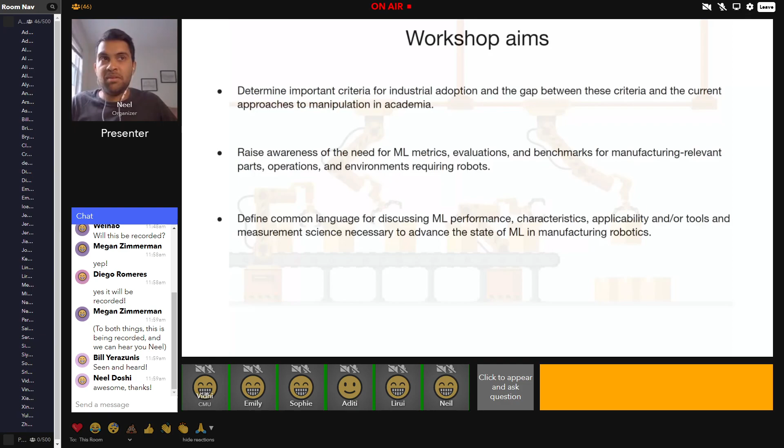The third is to define a common language for discussing ML performance. This is across both industry and academia. Common language for discussing ML performance, characteristics, applicability, and/or tools and measurement science necessary to advance the state of ML in manufacturing robotics. And the last one is form an ongoing community to develop, review, test, and contribute to concepts and tools that can help foster the adoption and implementation of ML-based manufacturing robotics capabilities.

In order to address these 4 aims, our workshop will consist of 4 sessions. Right after this will be speaker session 1, where we'll hear from 2 speakers. And immediately following that will be speaker session 2, where we'll hear from 3 speakers. There'll be a short 30-minute break, followed by an hour-long poster session, where we have 7 posters, followed by speaker session 3, and then an hour-long panel discussion. There will also be discussions at the end of each of the speaker sessions, so at the end of 1, 2, and 3, and those will be about 30 minutes, and they will just be limited to the presenters in that particular session.

We're going to hear from 8 awesome speakers today from both academia and industry. Actually, I think we have kind of an even split if you don't count people that have 1 foot in academia and 1 foot in industry as well. These are Jeanette Bohg, Matej Hoffmann, Danica Kragic, Arnold Kravitz, Juan Aparicio Ojea, Parag Patre, Al Rizzi, and Russ Tedrake.

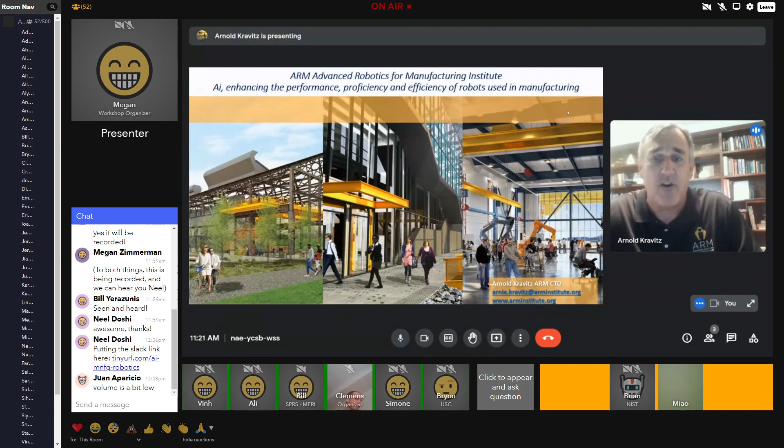So just to talk to you all about the ARM Institute first, I know not everyone is familiar with us. We are one of the DoD institutes. We are actually majority funded by the DoD's Office of Secretary of Defense. We're also funded by the R.K. Mellon Foundation and a lot of other foundations out there. We're about a 310 strong consortium of the leading robotics original equipment manufacturers, integrators, and tier 1 research universities, as well as innovators, and various government departments, including NIST, Department of Commerce, and the DoD.

As you can look through this very crowded array of pictures, and it's purposely crowded to tell you what a crowd we are, you can see just who this makeup is, from 3M on the material side of things, to Yaskawa as a robot OEM, to IAM Robotics in the area of autonomous mobile robots, to GE, to Raytheon, to Waypoint Robotics, to Fanuc, to UR, to Texas A&M University, Carnegie Mellon University, RPI, my alma mater, and many others.

It's a really great consortium. And what we really do bring to bear is the consortium of our members. The membership is our strength. And what we're really trying to do is maintain United States access to the latest robotic manufacturing and to encourage, enrich an ecosystem and a supply chain. So just to give you some of the views about us, we accelerate the development and adoption of innovative robotic technologies. We make robots, autonomy, and AI more accessible to U.S. manufacturers. We like to say we're democratizing the technology.

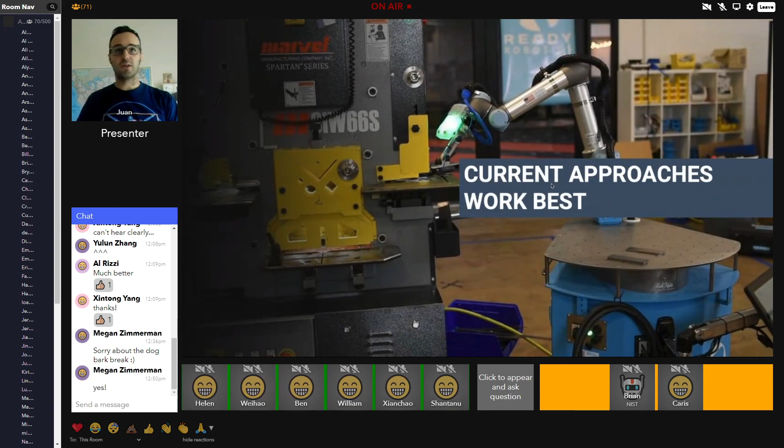First one, current approaches work best. I will play this video in a second. You will see a robot tending a lathe at the Stanley Black & Decker facility. I will argue, guys, if you go to a factory, if you can control the way that you are feeding the parts, right? The input to your process and the output of that. You will be much better if you don't have a camera, and obviously much better if you don't have any deep learning involved, right?

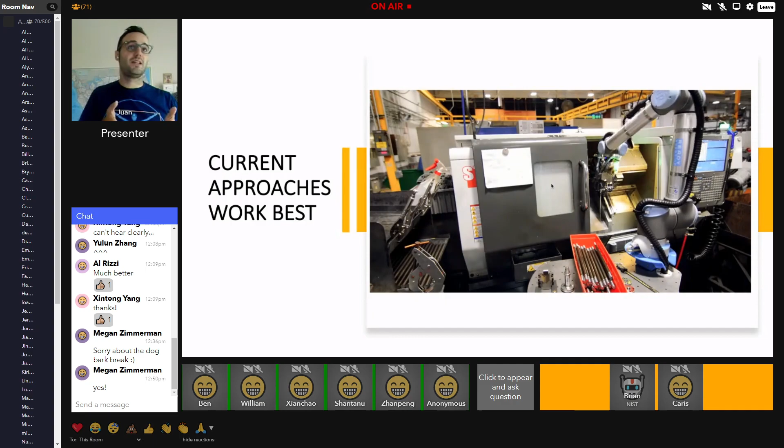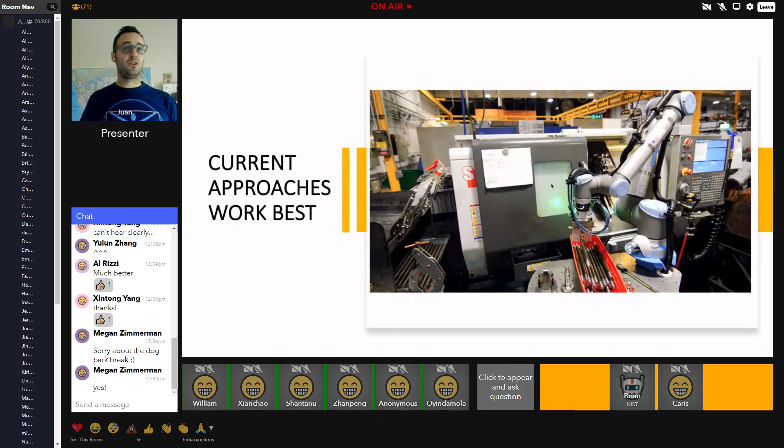Because what you care about in automation at this point is precision and speed, and these things only slow that down. If you add a camera process or any other intelligence in the loop, it will naturally be slower. So if what you're doing, like in this case feeding bars into a lathe, you can do it with traditional good old-fashioned controls and industrial automation.

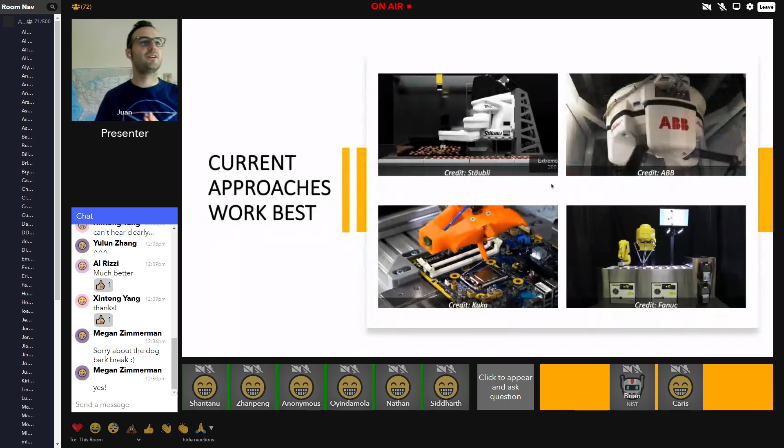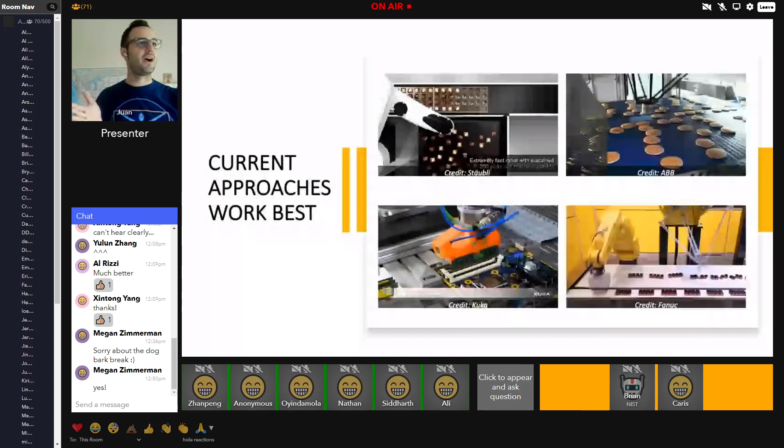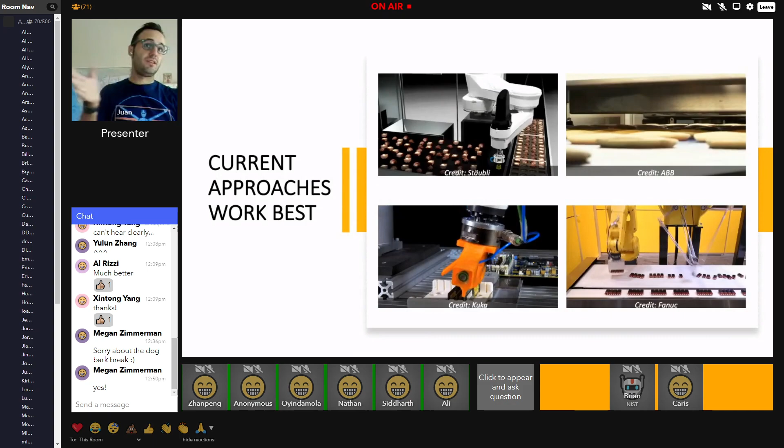Now let's say you really want to use a camera because you need it in your process, either for sorting candies, pancakes, or chips. In these four videos from top robotic brands, you can see you can also be very fast. There are Delta robots that work extremely fast, no AI needed, just good old-fashioned machine vision. You detect geometries that are easy enough to detect, and you just pick and place. And even in the example in the bottom left from KUKA, if you can afford fixtures, it's quite straightforward nowadays to create rules with force and torque sensors that enable you to do complex assembly like the one you see in the video.

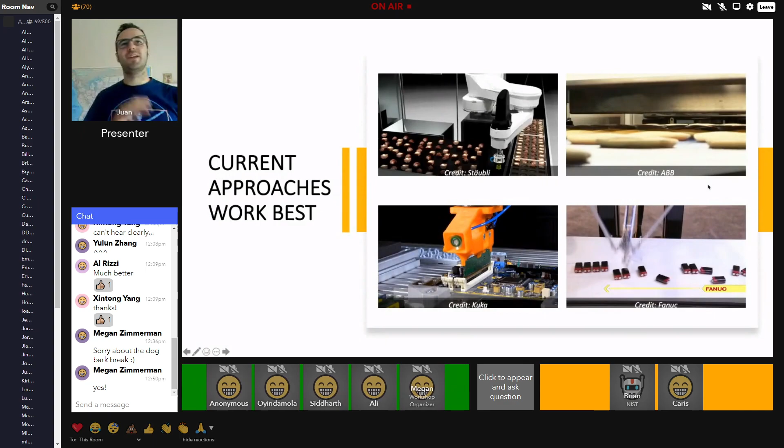Adding complexity, as you see in the video, all the objects are individualized — they are sorted out, not in heaps. So what happens if the objects are fed in heaps, all together? You still have solutions out there in industrial automation that enable you to individualize components, like the videos from FlexiBowl and Asyril here on screen, where there are bowls and surfaces that vibrate, and then the objects get individualized.

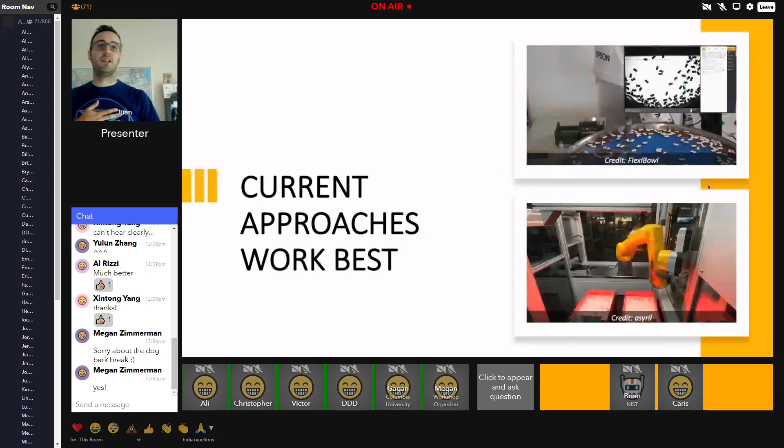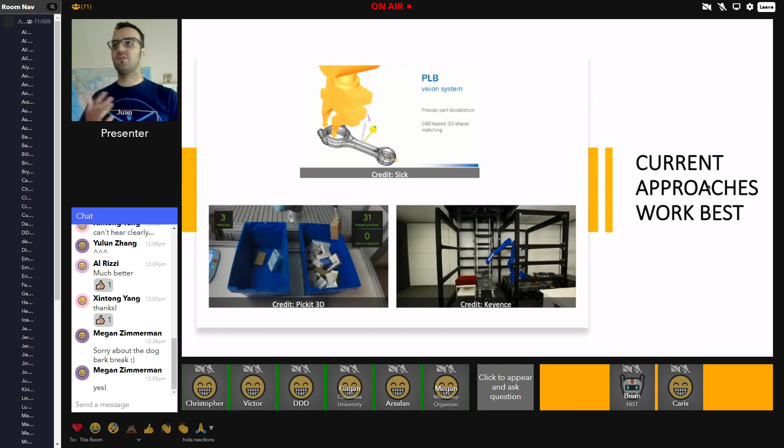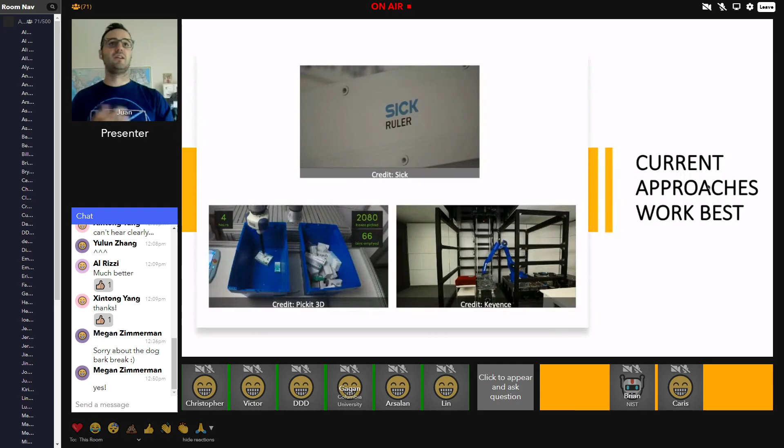Okay, but what if you cannot individualize the objects — either your ROI gets too expensive if you add these components, or you cannot control the way you get the boxes of material? Still, there are current approaches, like what you see on screen from Sick, Keyence, or Pickit 3D, using CAD-based 3D shape matching that works quite well. They leverage the fact that these parts have geometric features that are easily identifiable, so you can still pick them from a bin.

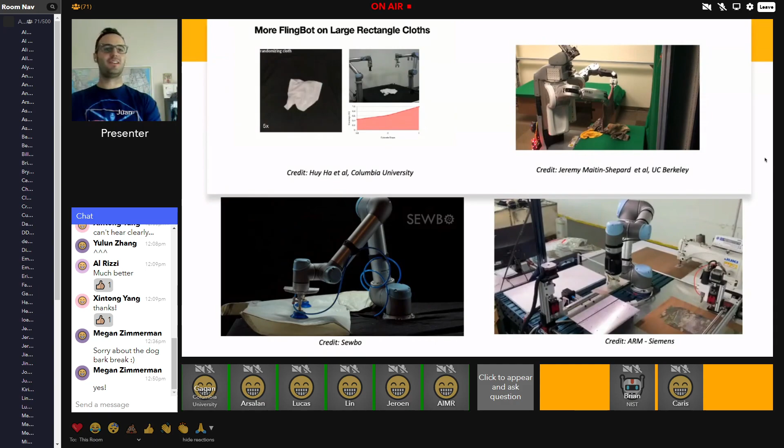Now what if you want to pick up clothing? That must be impossible with traditional approaches, right? And there is a lot of research in that domain. The first video is from Columbia University on how to unfold a piece of clothing. The second video is from Jeremy Maitin-Shepard and Pieter Abbeel, among others, at UC Berkeley — that video is from 2010. Look how amazing that was. You'd think back then that we'd have robots folding clothes by now, but they are not. If you go to any textile plant producing t-shirts, for example, it's all manual. Robots are not up to the task because there is so much variability — it's really, really difficult to manipulate things with so many degrees of freedom.

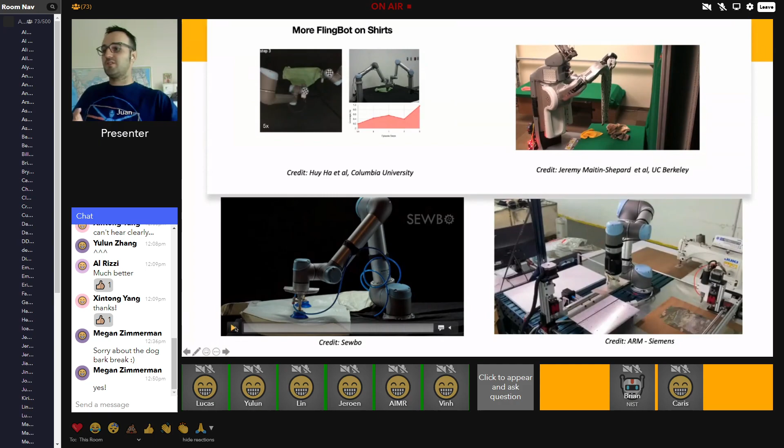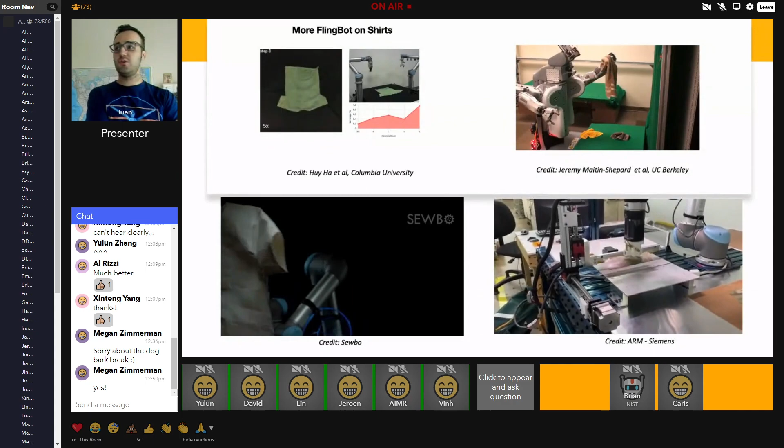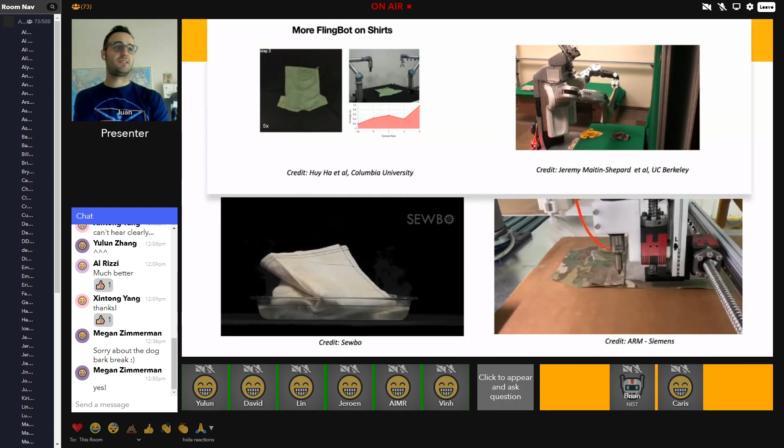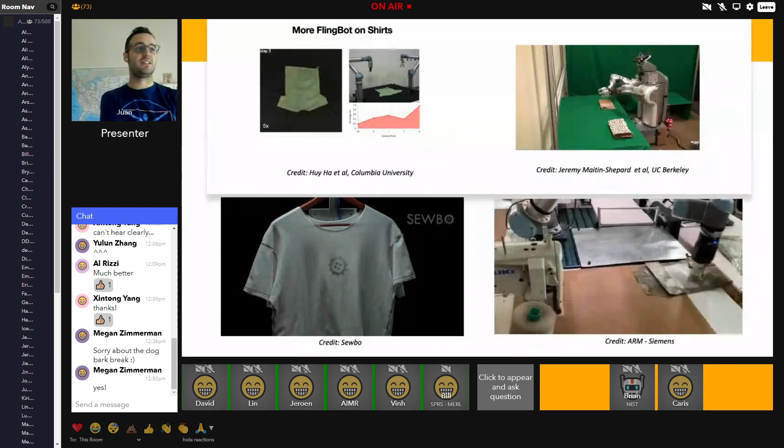But do you need to? That's where other approaches work very well. The videos at the bottom are from a company called Sewbo, a startup based in Seattle, that has produced a method to stiffen fabric with some materials that then dissolve in water, and voila, you have a t-shirt. The video on the bottom right is a project funded by ARM together with Siemens. The PI was Gokul Narayanan, also together with Sewbo, where that process is now industrialized at the Blue Water Defense Facility in Puerto Rico.

The bottom line is that's where the ingenuity happens. There are years and years of good industrial automation that have been matured in industries like automotive. If you can leverage those, you'll be much better off than adding new methods that still need to mature. So the natural next question, and the conclusion, is that in manufacturing most likely you will have CAD files, the entire modeling of your plant. So if you design for robotic automation, you'll be much better off using traditional approaches. But then what are we doing here?

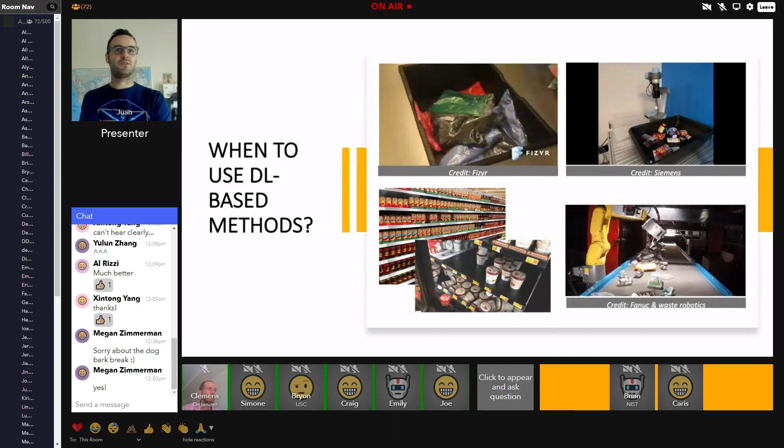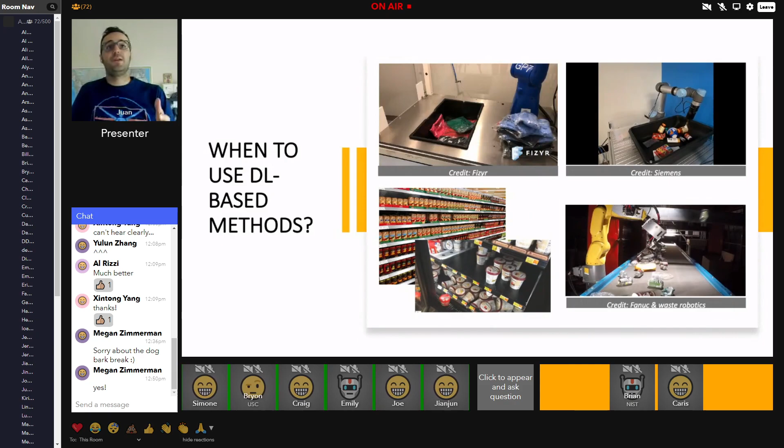I could spend 20 minutes just naming startups in this domain because it's a very hot topic, particularly driven by intralogistics, where you cannot control what is in your bin, and you still need to pick it and place it, right? But an important lesson and takeaway is that the price of being wrong is not too high.

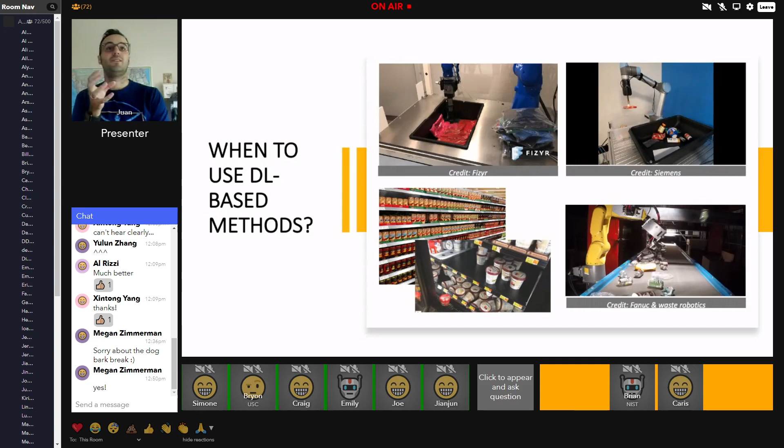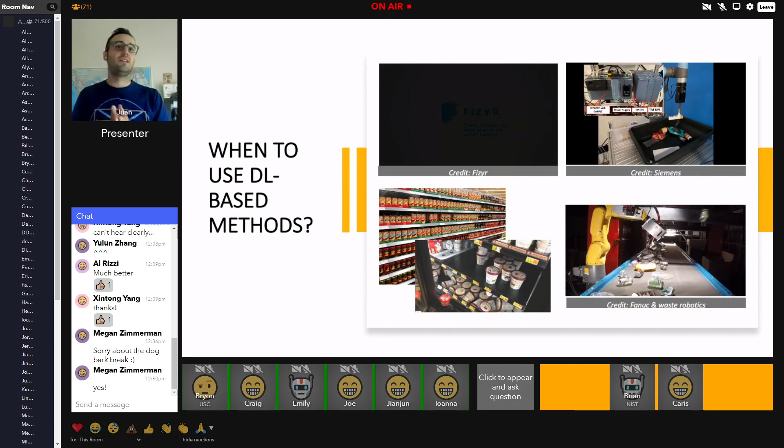Nobody cares about the successful picks. It's a metric that is good for a paper, but nobody cares in intralogistics. What you care about is the speed of the system. If you fail 10 times, but you're still faster than a human or comparable, that's fine. That's also why a lot of these companies try picking with the suction cup first, because it's very forgiving. In the surroundings of the optimal gripping point, you will most likely be lucky enough just to grasp it. So even if you miss, that should be fine.

Another good example is picking from shelves. I found a lot of videos on the internet trying to solve the case in the picture in the back, where it's a very nice shelf, everything organized. But I don't know about your supermarket, mine doesn't look like this. It looks more like the picture on top with the ice creams, where everything is disorganized, and robots still have a hard time there.

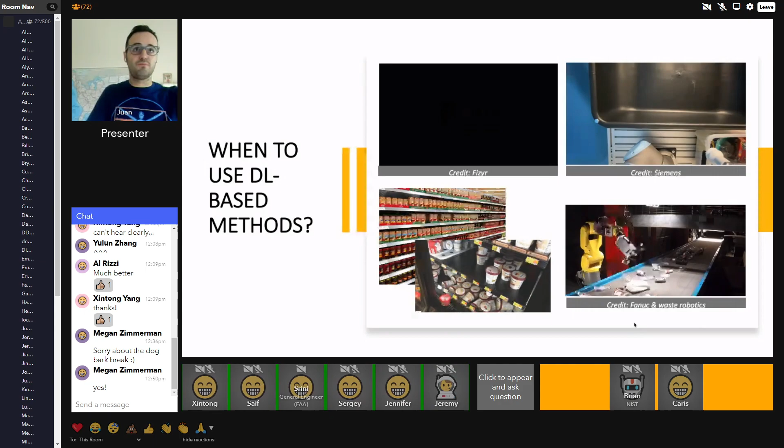Another very good example of where to apply deep learning, again where the price of failure is almost none, is recycling. This is from Fanuc and Waste Robotics, amazing work where you just need to identify the parts that can be recycled. If you miss one part, it's not the end of the world, because the comparison point is you don't recycle at all. So you are always better.

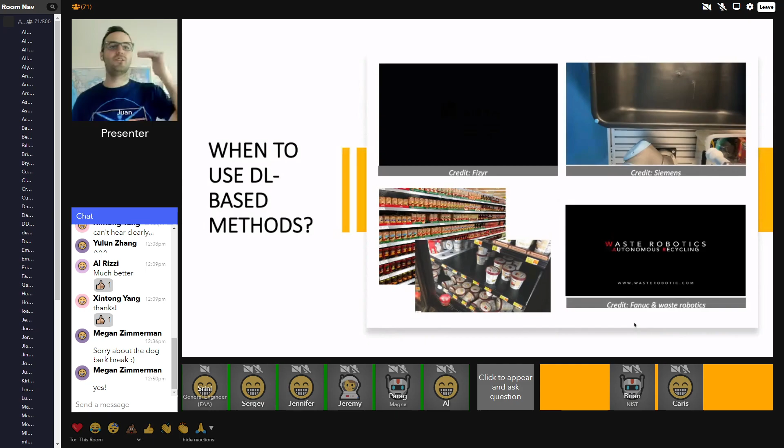That reminds me of the same thing iRobot did with the Roomba. Initially it was targeted at a market of people who really loved cleaning and were very intense about it, and that was not the right market. The right market they discovered was students, because the baseline was 'I don't clean my room at all.' So if I clean a little bit, I will always be better than the baseline.

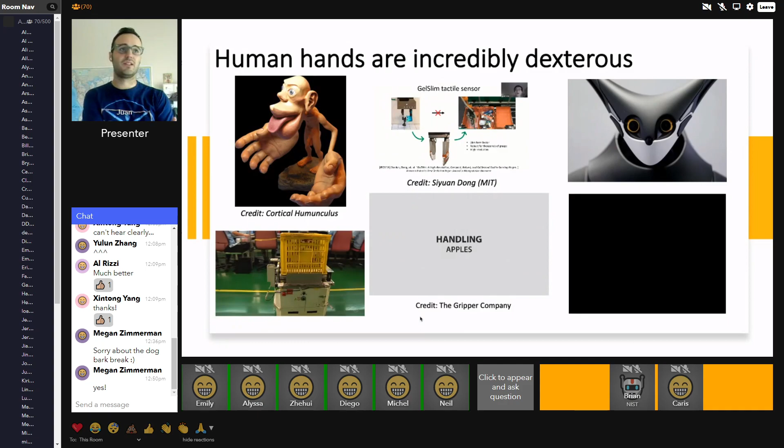Most grippers today are still these two-finger grippers that were developed years ago. One could argue that tactile sensing, like the research done by Alberto Rodriguez at MIT, is extremely impressive and will help increase the dexterity of our grippers, or things like soft grippers, like the one developed by the gripper company. But I'm not so sure that's the bottleneck now for automating more tasks.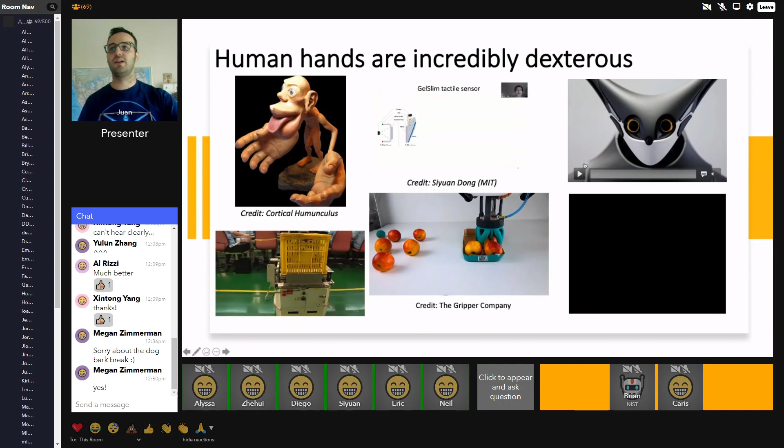As you can see in the videos on the right, these are two examples of teleoperated robots with very clumsy grippers that can still do their work just fine. The key is that there's a human in the back controlling things, a human in the back taking care of the autonomy.

If you're from Berkeley or have been there, you may have seen the Kiwi robots delivering things from one place to another, from the restaurant to wherever you want. Those are actually controlled from Colombia. So you remove all the autonomy part, which is the hardest part, but you still have a product. That's very ingenious, as you can also see in this robot from Japan that is really completing an order from a shelf, but is teleoperated.

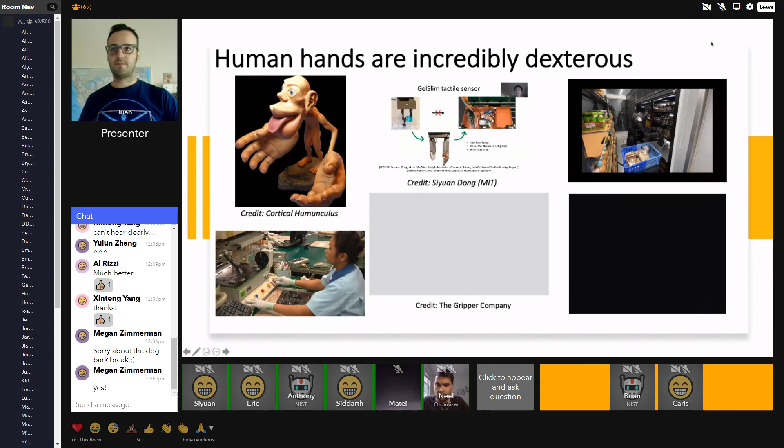So that was regarding the current systems working best. A takeaway: when we're introducing a new technology and saying this AI method will revolutionize manufacturing, please compare it with traditional methods, because they also go a long way. We're producing thousands and millions of products today with that technology.

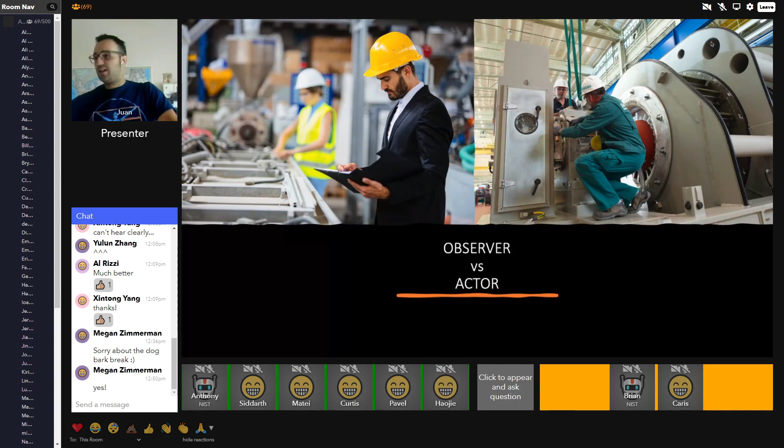Non-deterministic behavior. The issue in manufacturing is that in industrial automation you control the throughput. You know you're going to get 200 cars per hour, and that's it. It's precise. If you don't get that, it means you've done something wrong. But if you're using an AI-based method, you don't necessarily know. It will be a range, because it depends on what is in your order, for example, to fulfill.

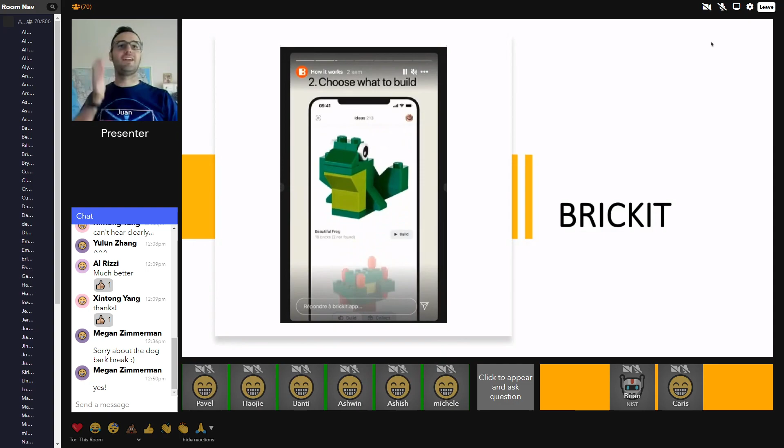There's a big difference between being an observer and being an actor. When you're an observer, everybody has seen this kind of technology recently from Brickit, a group of researchers from Russia. Super cool: you put a pile of Legos and it tells you what you can build, identifying what Legos are there. Again, the price for being wrong isn't a lot. You might get a part wrong, but nothing breaks.

The solution was that the team tested different neural networks and found that the Mask R-CNN developed by Facebook was one of the best, with an accuracy of 90%. You might ask, is that good enough or not? I hear all the time that in manufacturing I need 99.999% precision. Well, if the baseline is that I don't know where my parts are, and now I know with 90% probability, that's much better. So I can design a system — that's where the art comes in instead of the science — a system that still adds value to the customer with those probabilities. That's on the observer side.

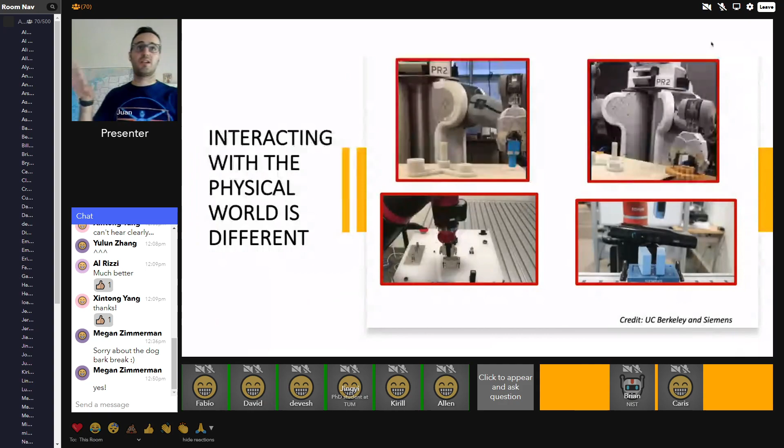I'm just looking. Interacting with the physical world is another world entirely. You'll see now on screen a bunch of robots failing miserably at tasks that my three-year-old can now master. But it's hard, because contact dynamics are hard.

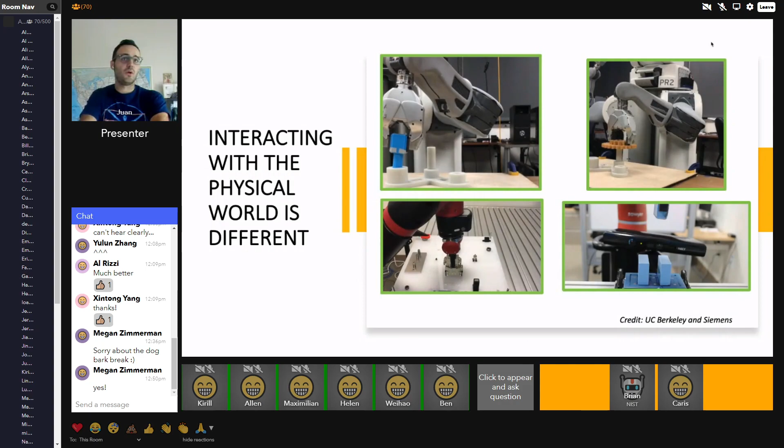These can be improved with some methods — in these videos we were using meta-reinforcement learning or residual learning, applying things like model predictive control for most of the path, and then, when touching the part, using reinforcement learning combined with simulations. The same in this video, work led by Gerrit Schoettler, Tobias Johannink, and Eugen Solowjow, where we used meta-learning for doing these tasks.

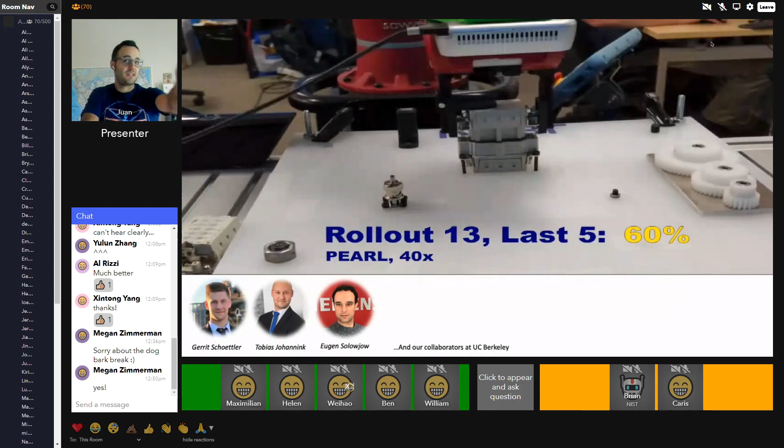And still, this is the NIST benchmark. Very cool that in just 20 trials you can master this. But that's where the gap between research and manufacturing happens. There's still a long road until this hits manufacturing, because you have to make it reliable — you have to make it precise all the time.

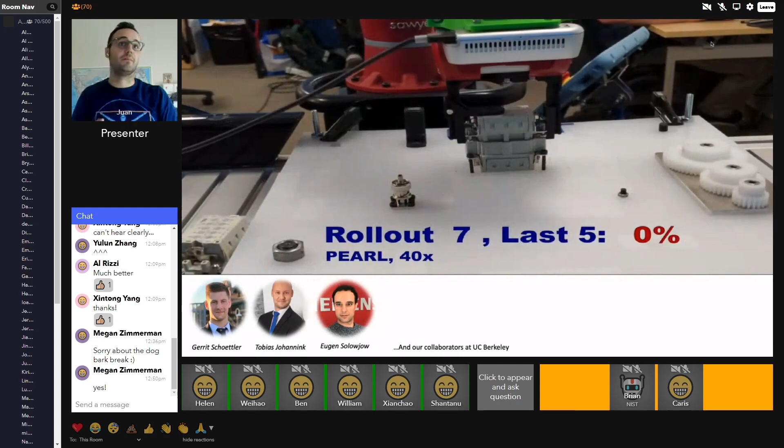I don't bother reading these graphs — I can tell you they're all predictions of self-driving cars, and they were all wrong. We should have millions of self-driving cars out there by now, and as you know, we don't. The same happens with AI in manufacturing. I think as a community we have to do a better job setting expectations — things take time to mature. It's very different to show a video that works one out of ten times on YouTube versus something that works 24/7. That's what you need TRL 7 to 9 for.

Now, the last two: edge cases and black box, no way to debug. I'd like to join them together. For the first one, edge cases — I'm taking this great tagline from Plus One Robotics: robots work, but humans rule. I think that's the mistake autonomous cars sometimes make, that driverless doesn't mean humanless. You can still have a human for edge cases. When something goes wrong, you call a human, and they take care of the edge cases. So instead of one robot to one human, you may have one human per five robot stations. That's fine.

What you see in the pictures I'm pointing to are also intuitive ways to have user interfaces that really facilitate that. For example, if you're doing CAD-to-path from RobotMaster, a very useful tool, you can have a very complex path created with an offline tool. But for final touch-ups, if something goes wrong or the real world is slightly different than your model, you can still enable a human to do that.

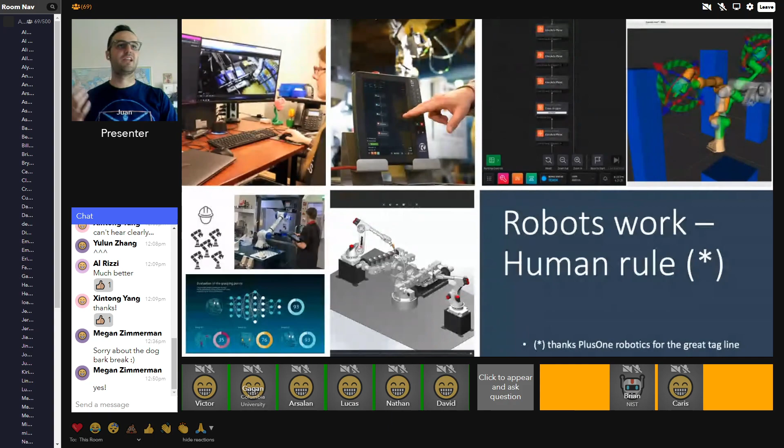That's an important case for the explainability part of things that people highlighted as a problem. We need more explainability. This is work by Jack Huckabee when he was still at Georgia Tech—now he's at Ready Robotics—creating a taxonomy for manufacturing assembly tasks, where a task can be divided into skills and then skill primitives.

These primitives can be very complicated AI-based ones, but there's still a taxonomy where you can go from bill of process to bill of materials to bill of processes and divide that into tasks. That requires a lot more research, and it will be super useful to mix this symbolic AI part of things with the hot data-driven deep learning approaches—extremely important to facilitate explainability and how robots acquire autonomous skills.

This is another example from Kel Guerin, now the CIO at Ready Robotics, which he proposed when he was at Johns Hopkins University. This was the start of the research that later led to Ready Robotics, where he created symbols and predicates that can come from a perception system, for example, but are then aggregated by a predicator, and there's a behavior tree that unifies this information.

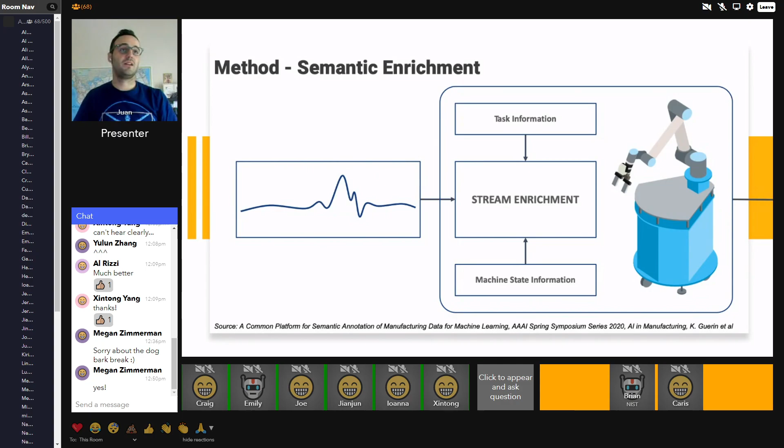Successful picks isn't necessarily important—station throughput is an important KPI. We need to compare to existing approaches, and really be careful of our messaging when we put that out there. We get a lot of attention in the news, and it looks like reinforcement learning will revolutionize manufacturing and Amazon won't have any workers because everything will be automated. It still takes time.

It takes time, and it will take time. The same happened to other industries like self-driving cars. If you ask everybody 10 years ago, it was around the corner, and it's still not there. We shouldn't follow those mistakes.

We need to standardize ways to collect and annotate semantic data, and find easier ways to contribute that data for R&D. Autonomous functions surrounded by good old-fashioned control provide reliability.

Potential costly failures make it enormously difficult to implement AI-based robotics. A wrong pick, nothing happens. But if you assemble wrong, if you put the wrong assembly on a product, it can explode sometimes, if you're assembling a battery, for example. The cost is much higher than having a wrong pick or a wrong item delivered.

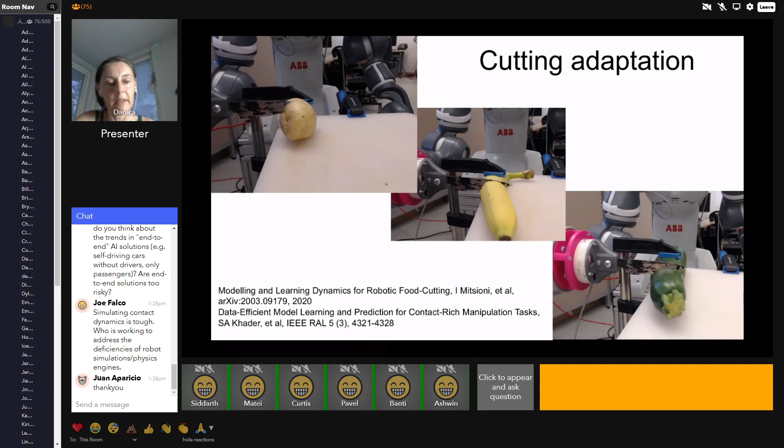interaction with the environment. Simulators have been mentioned, and I think that this is also one of the challenges we are currently dealing with, the inability of actually generating enough data with real physical robots, learning from small data sets and so on, and also the fact that there are many simulators out there, but that they have been designed with different

topics in mind. One of our recent Science Robotics papers actually surveys this, looks into how various types of physics-based representations have been coded in those simulators, and what types of problems in terms of interaction have been addressed by using different types of representation.

So the point being that, depending on what applications people work with, the simulators are very much tuned towards that particular application. There are no simulators today which we can, let's say, easily use for both simulating interaction with, for example, clothing items and for cutting fruits and vegetables. We really need to spend lots of time designing tasks.

So we also are interested very much in benchmarking approaches. In the robotics community, one of the challenges is that most of the labs have access to very different hardware. So in relation to clothing items or deformable objects, this is one of the Robotics and Automation Letters publications that we recently had, about proposing a benchmark for bimanual cloth manipulation.

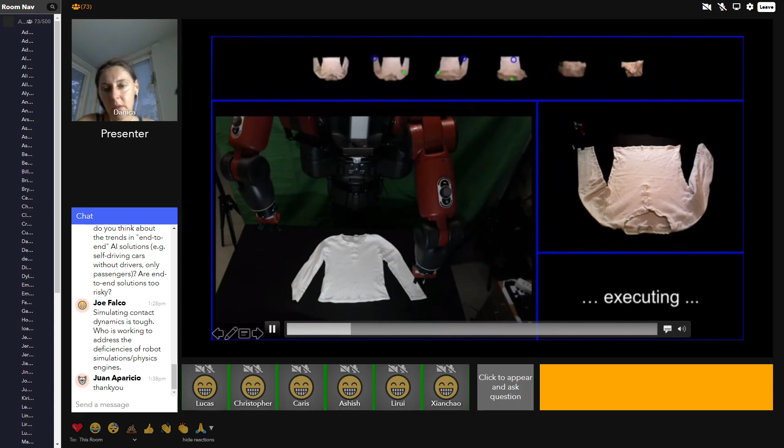And this is just an example. It's not sped up, but the system is fed the start and goal position. It generates a set of all possible shortest path plans and starts to execute, and in this case we have Baxter using both the left and right hand.

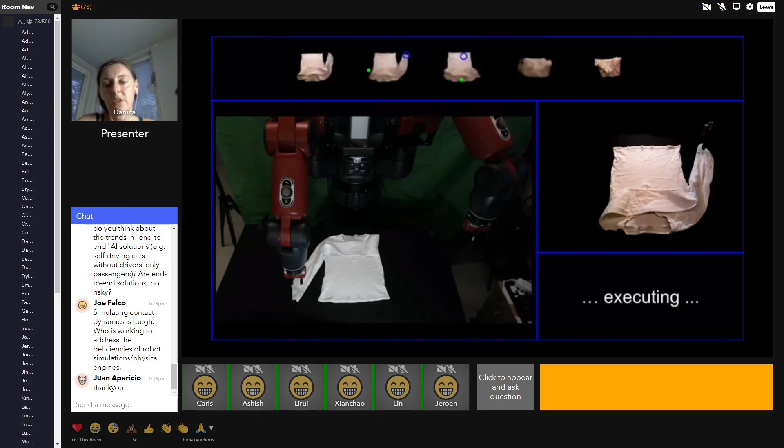After the first action is generated, here you see the generated plan. The outcome is always compared to the current observation, and if the current observation does not correspond to what is expected to be seen in the plan, then replanning is done online. So it will do the folding.

Now, we can talk about this for quite some time, what the challenges are and whether this was a relevant thing to do and so on. But what I think is interesting is that we can actually demonstrate that the planning for this very high-dimensional task can be structured in such a way that it can be performed in real time.

And then there are, of course, a bunch of things that we could extend on. For example, considering textured items, changing the geometry, if the sleeves are shorter, if there is potentially a buttoning that will affect whether we want the front or the back to be the main part from which we start folding, and so on.

And also, given that we can do folding, can we do unfolding? For those doing grasping, unfolding things is much more difficult than folding, and I think you understand for obvious reasons. So I think there are still many interesting problems there. Can we just reverse, use the same graph, or do we need to find other types of representative states, because many more things can go wrong when we start to do unfolding.

What I think is very interesting is when we do robotics research and solve some of these problems that cut across motion planning and representation learning and so on, there are many other problems that we need to address and that are maybe more interesting for other communities.

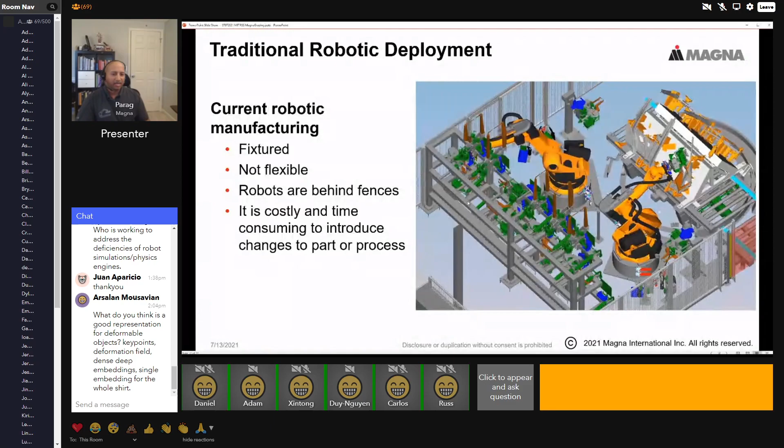So this is kind of how the current automation, which is widespread within manufacturing in Magna as well as in other automotive, works. And the point is, from all the 30,000 parts we saw before, there is still a huge scope for automation. This is where the parts are in unstructured environments.

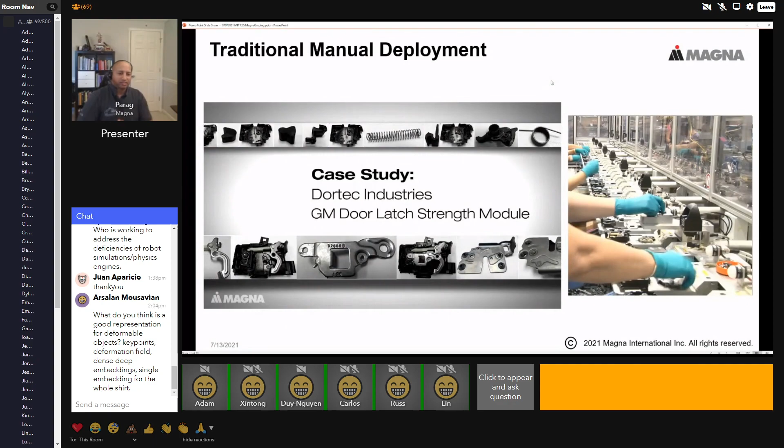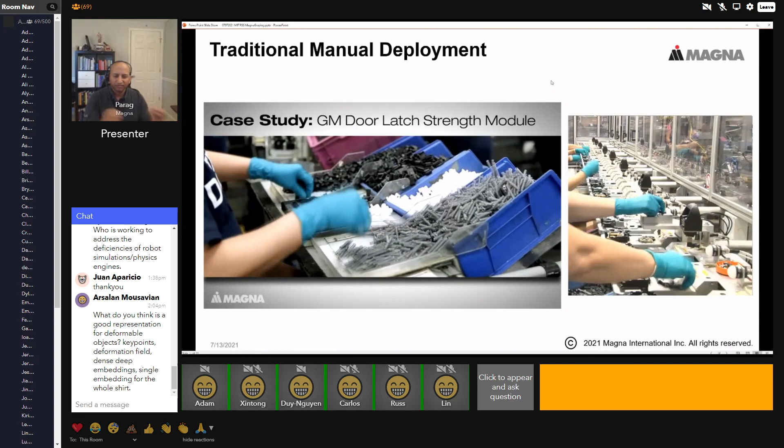Just to show you case studies, this is from Dortec, one of the subsidiaries of Magna in Canada. You will see an operator building a simple thing in the car, which is a door latch assembly. So that simple housing will consist eventually of 50 different parts which need to be assembled, and they all need to work together. The tolerances here will be really tight.

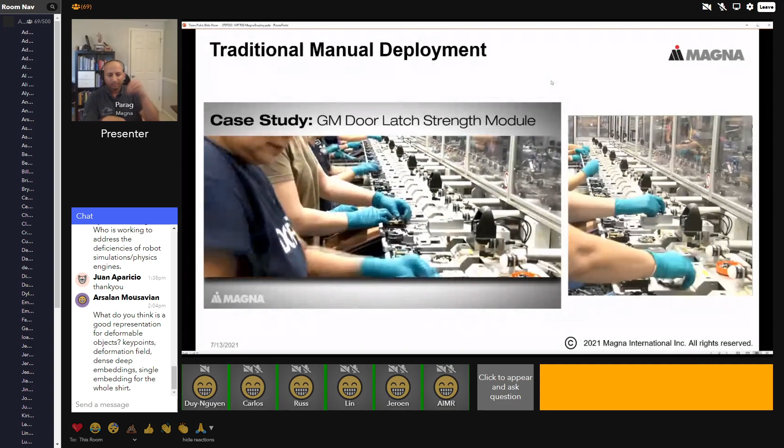For the human operators, this is relatively easy because they are able to just blindly dip their hands in the bin, pick up parts, feel their way around, and they are able to do the assembly and insertions. So the video gives you a sense of just the number of operators who are involved in making something like a simple door latch that goes into a car. Obviously, each car can have 2 to 4 different door latches, so the sheer volume of this product can be imagined - it's in millions per year.

So this is a benchmark line, at least internally for us at Magna, that we look at as something to define the specs, or define the technology packages that we need to solve, to automate some processes like this which have an unstructured environment. They need perception methods, as well as tactile perception, force feedback, advanced path planning, and so on. And we think if we can solve this problem, we can then trickle down those pieces to other different problems within Magna.

We talked about the unstructuredness of the parts, and this slide basically gives an idea of how a raw material will typically make its way onto the floor. And previous speakers touched upon that. If you focus on the left side of the slide, if we just purely look at the nature of parts, you have parts that are darker, parts which are shiny or oily, and some of them will have hindrances - basically plastic coatings or rust protection.

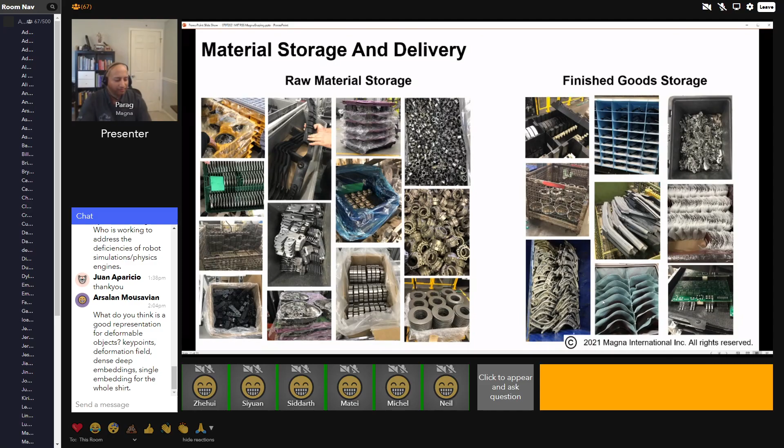This is where we see some opportunities for future AI-related work. Just to summarize what we've seen so far: processes will have tight tolerances. Everyone wants their cars to have good finish, no gaps, good seams, and that goes all the way down to the sub-component level. So tolerances are one of the biggest challenges for anyone getting into this space, along with fast cycle times.

In order to do both, you have competing objectives, and this is the first level new players—startups we work with—need to cross. We would work with them to define these specs and prove out their technology.

The third bullet is high part variety. This is a challenge, but nowhere near as much as in warehousing, where a single bin may have many different types of parts. At least within the automotive manufacturing context, this isn't an issue—typically you'd have the same type of part in a bin. Then reliability is another aspect.

Whenever we deploy a new tech package in a production line, even if it stops for an hour or so, that can mean several millions of dollars of lost production. This can create liability, and there are waivers or insurances that the integrator must sign up for when taking on these projects. This could be a roadblock for new players to get into a risky space like automotive manufacturing, because reliability is required and must be proved out.

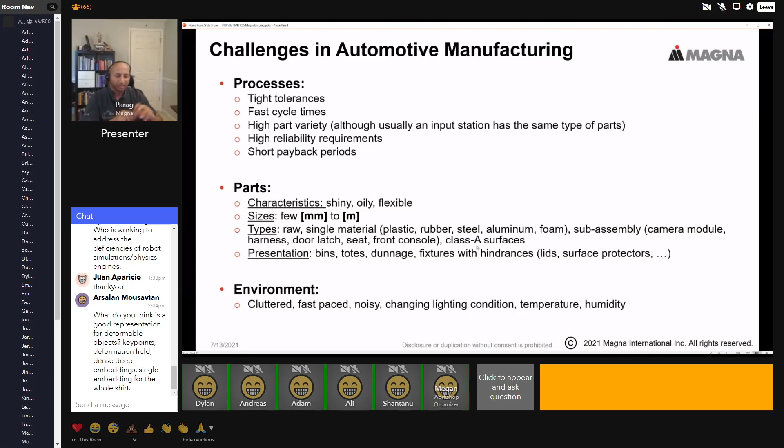Within Magna and the general trend we're seeing in manufacturing for new robotic systems, we are focusing on the adaptive part - the ability to deal with inconsistency in part presentation, flexibility to handle multiple parts from the same family in the same cell, and some dexterity. When you pick a part, are you able to manipulate it while making a move and do a force insertion? Then there's the collaboration part, where we want to get rid of the fences. All of these are measured against KPIs like cycle time, operational efficiency, capital, and so on.

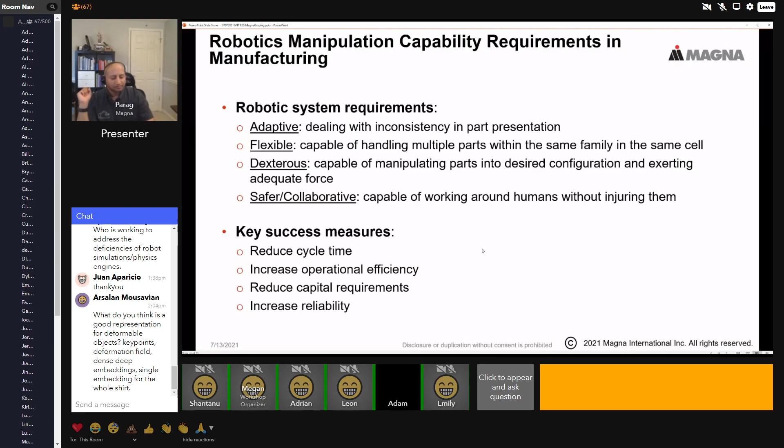Just to give a current state of what we've been doing - I'm specifically from what we call the Advanced Robotics Group within Magna here in Michigan. About 5-6 years ago, we started this program to look into how we can take our manufacturing to the next level. A lot of the manufacturing process, as we saw in the video, relied on human vision, feel, and the operator's ability to plan next steps, store information, remember instructions, and execute the task. So we're taking that motivation and going from human senses to finding the equivalent in the tech space, like vision systems and perception, finite state machines, path planning, and so on.

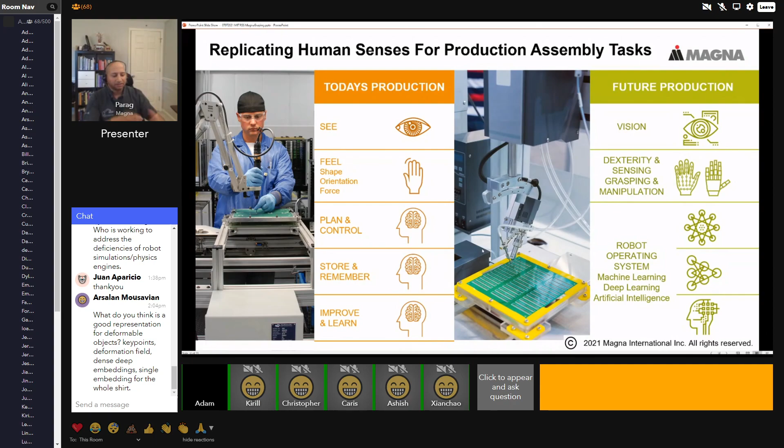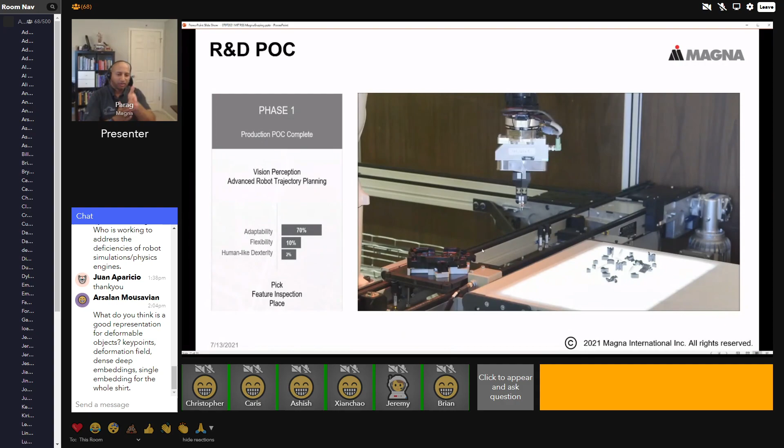This is an old video from 2015 when we started this journey. We focused on the same door latch parts - these are parts about 1 centimeter in size - in a basically unstructured environment using a vision system. There's some path planning going on, and when the robot inserts the objects, it's like a press fit, so you need to rely on certain force feedback to make sure the item is in place. When you assemble an object like a spring, there's also some complex motion it has to execute. This was one of the early proof of concept projects we did back in 2015.

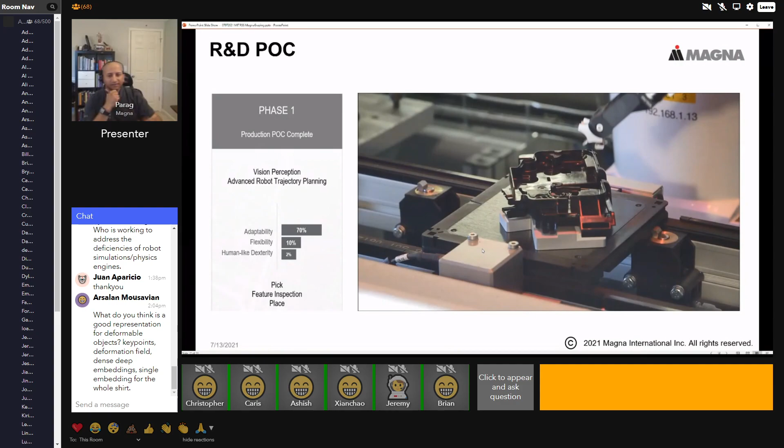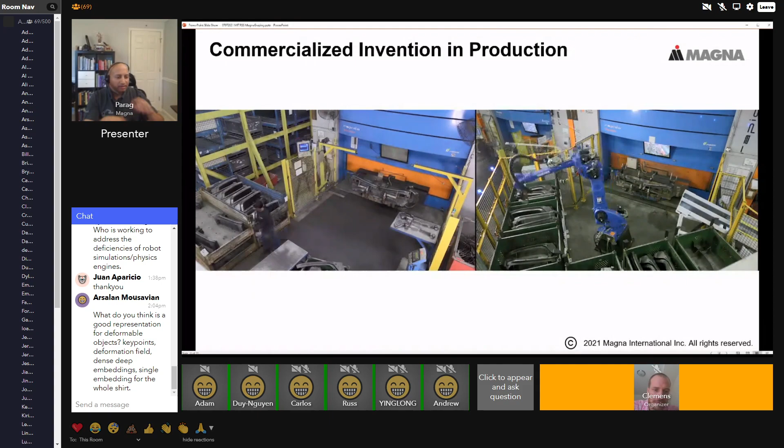Let me play that again. On the right, we see the bins - on the left side we have the left A-pillar, and on the right is the right side A-pillar. The parts are somewhat structured, but the bins can have them at 0 and 180-degree orientations. They are tightly stacked, and the spacing between parts can vary from 2 millimeters to 4 or 5 millimeters, so there's some variability in how the parts are stacked. There's also some roll, pitch, yaw. The vision system needs to very precisely locate the parts in time so the robot can grasp it and perform the same operation. This was in production until the end of that program.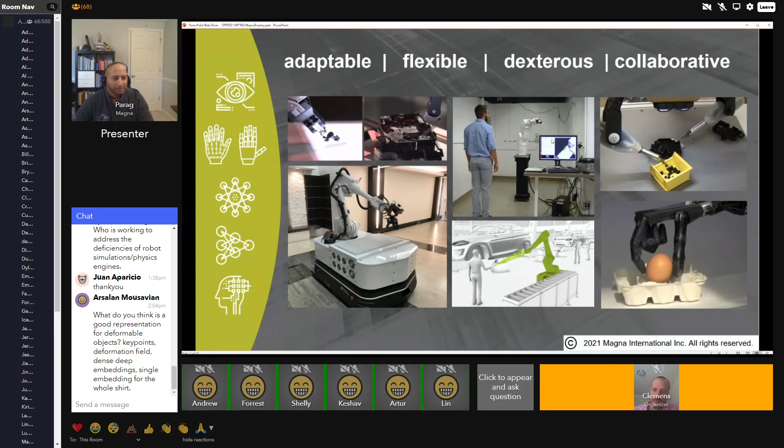As I mentioned previously, for any such thing, we would always start with a pre-production proof of concept, validation, and verification in the lab. We have a few labs here in Michigan, as well as in Europe, engaged in these activities. And then the next phase is to go into full high volume production.

So I think that's the end of my talk. I have my email address for any further questions that will come up later on. Thank you.

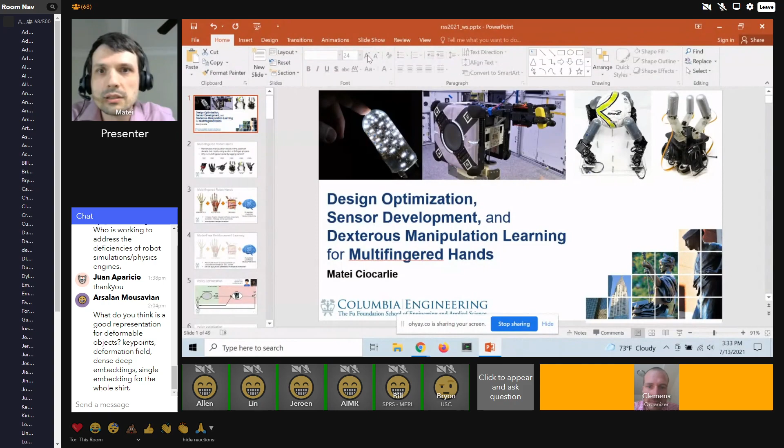All right, looks good. So the last speaker of this session is Matei Ciocarlie. Matei is an associate professor of mechanical engineering and computer science at Columbia University, where he leads a grasp manipulation research group. I actually personally remember one of the first papers I read in the space of grasping and manipulation was his eigengrasp paper on low-dimensional representations for grasp planning, which was pretty cool. And what I value a lot in Matei is this broad expertise that spans not only algorithms, but also hardware and sensors. I think this is kind of unique and places him at a very interesting spot research-wise to tackle this complex problem. Today he's going to talk about design optimization, sensor development, and dexterous manipulation learning for multi-fingered hands. Thank you so much, Clemens.

That was such a great introduction, I really appreciate it. And guess what, I have some eigengrasps in my talk today. Talk about what Danny was saying about going in circles - it seems like I was certainly nodding when she was talking about going in circles. And there you go, our eigengrasps paper, the first one was, I think, 2007. And here we are 15 years later, and I'll be talking a little bit about joint synergies again.

It makes sense in a way, because what I'm here to do today is to talk about our research on multi-fingered robot hands. I think the field has just seen tremendous advances in the last half decade, many of them driven by machine learning and reinforcement learning on manipulation in clutter, in unstructured environments. But still, with a few notable exceptions, many of these results have used either suction vacuum grippers, like Juan was mentioning, or two-fingered grippers. I noticed Andreas ten Pas in the audience, who pioneered the use of machine learning for unstructured pick and place with a parallel gripper. We have multi-fingered hands - people have been building this wide spectrum, all the way from two fingers, one motor, to the super complex shadow hand with five fingers, more than 20 motors. Why is multi-fingered dexterity lagging behind in academic research?

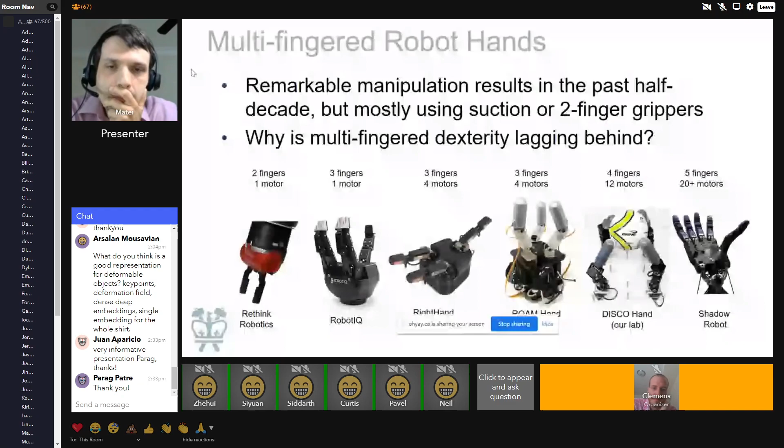And then the corollary question is, well, why is multi-fingered dexterity so hard? Is there a need for it? But also, why is it so hard? And I'm arguing that when it comes to multi-fingered hands, all of a sudden, all of these aspects come into play.

We're talking about the kinematics, which, you can have all kinds of kinematics in a multi-fingered hand. It's not a parallel jaw where they have to oppose each other. Actuation, how you actuate your kinematics. Sensing all of a sudden becomes very, very interesting. You've got all of these degrees of actuation, and you want the sensing that goes with them. And then, of course, planning, learning, teleoperation. So all of these components, all of them difficult by themselves, and then the interplay between them, just so complicated when it comes to multi-fingered hands.

And one question we've been fascinated by in our lab in the last years is, out of all of these places, where does intelligence live? And sure, it lives in the brain at the computational level, in the planning and the learning, and that's what we're used to. But is that really the case? Is it really the way it has to be?

Looking at the results of the last half decade, we've had remarkable results, many of them with model-free reinforcement learning, but not only. Andreas's work, the original work, was with supervised learning, self-supervised learning, and now lately we're seeing a lot of work with model-free RL, focusing specifically on the computational level, and learning policies, learning controllers.

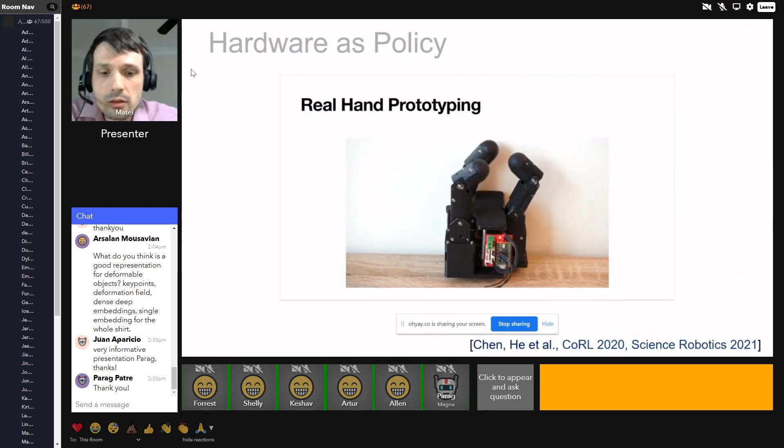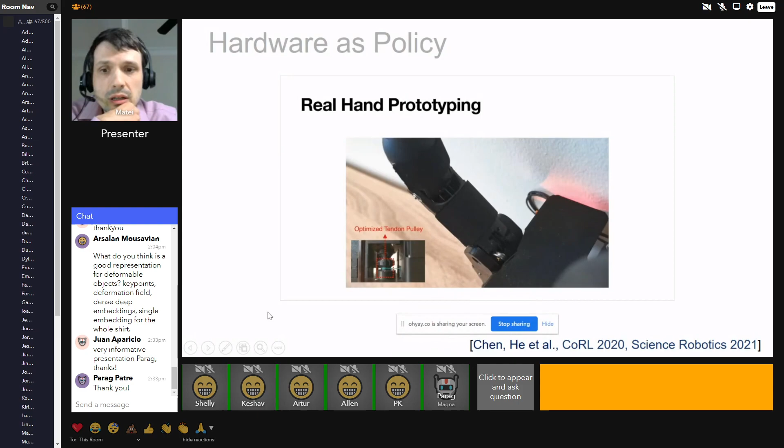You know, we can domain randomize, and then we can take the resulting hardware policy and implement it in real hardware. So here you see the optimized tendon pulley radius resulting from the optimization built into physical hardware in a real hand. The springs that you see here providing extension, their stiffnesses and their preload levels are the ones resulting from the optimization. And then it works in the real world.

Let me skip forward. So here we are using the computational policy and the hardware policy together. The computational policy is in charge of positioning the wrist and deciding when and how much to close the fingers. And then obviously the hardware policy takes it from there and produces torques at the joints. So this is one example, but I feel we've just really scratched the surface.

You know, hardware and software co-optimization is not a new idea. It's been around for a while, and it's potentially very, very powerful. And we know that in natural evolution, hardware and software evolve in this beautiful symbiosis, one for the other and with the other. And all these new developments that we've had with fantastic, stable multi-body physics engines, with sim-to-real transfer, with cloud computing, and with model-free deep RL, all of these are coming together for really a golden age for hardware and software co-optimization, which, you know, hopefully we're just at the beginning of.

And here's another example going back to synergies. And this is work that we're doing right now. It's very, very active work. Synergies are patterns of coordination between joints. And again, not a new concept by any means, both in kinesiology and in robotic manipulation. But we think that this new perspective allows us to have new ways to discover such synergies, right?

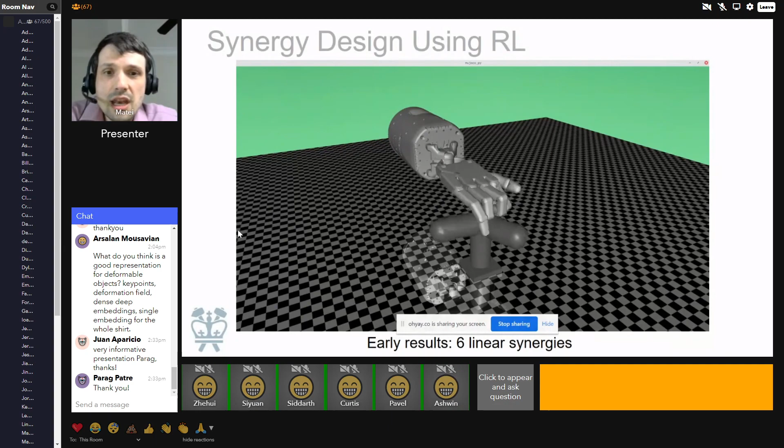So this is the Shadow Hand, 20 degrees of freedom, using just 6 linear synergies to turn valves going from 0 handles. The previous one had 0 handles. This is a valve with 1 handle, a valve with 2 handles. And then finally, you'll see it turning a valve with 3 handles. So 6 linear synergies enable all of these tasks.

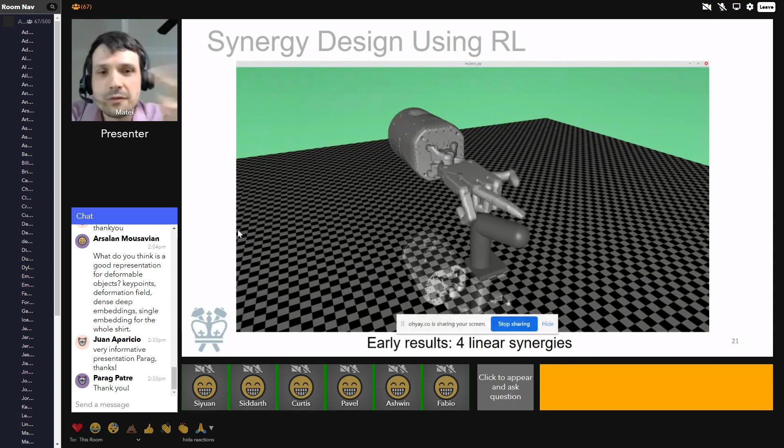Interestingly, what we're seeing so far is that 4 linear synergies don't. If we're just trying with 4 linear synergies, it does very well at a number of these tasks. It doesn't really succeed at the single handle. It gets sort of stuck. It can't really figure out how to get it, slowly gets it all the way around with just 4 synergies. It does the other 2 tasks quite well, the 2 handle and the 3 handle, with 4 linear synergies.

If we allow the synergies to be non-linear, this once again enables all the tasks. So, again, there's still a lot of work to do here. And we're pushing ahead, but we think that this could potentially be a very, very powerful tool. So ongoing work. Okay, so with that, let me switch gears. There's one more project I want to talk about.

I'm almost out of time, but there's this one final discussion that I want to have about tactile sensing, because so far, we've been focusing on one end of the spectrum where we're looking at very highly underactuated hands, very compact, limited sensing. A lot of the intelligence goes in the kinematics, and we're trying to optimize the kinematics to behave intelligently. At the other end of the spectrum, you have these fully actuated multi-fingered hands, which can be highly sensorized. So they give you an opportunity to also put intelligence in the computational components.

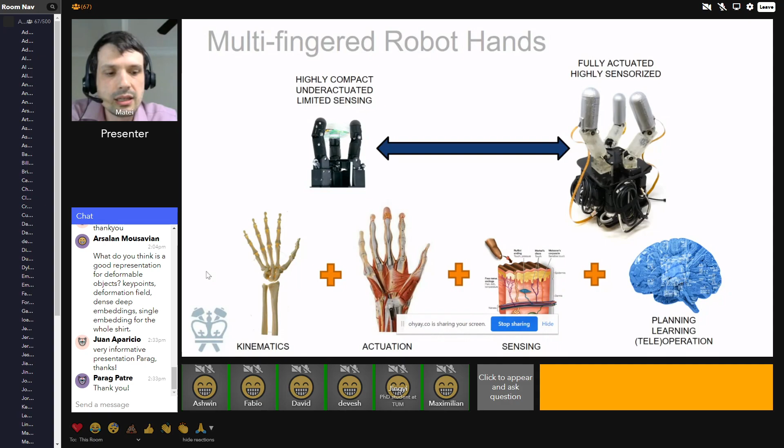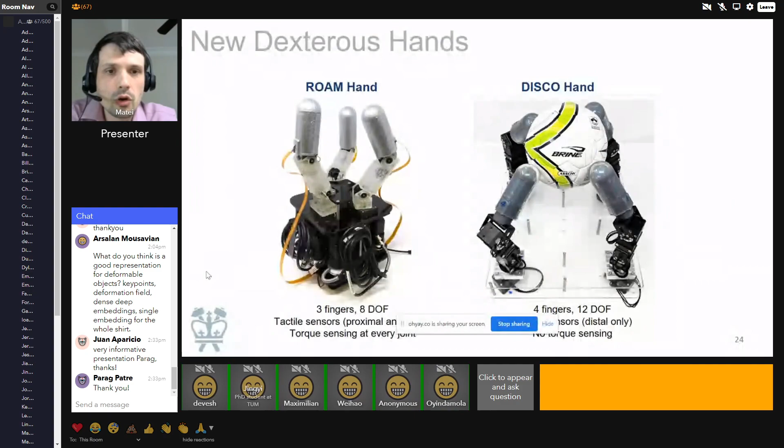And we're building a couple of these. We have a 3-fingered, fully actuated sensorized hand that has tactile sensing and proprioception, and then also a servo-driven 4-fingered hand, which only has tactile sensing. It doesn't have any torque sensing. We're playing a lot with both. The tactile sensors that we have on these hands are our own, we call it the DISCO finger, distributed interleaved signals for contact via optics, of course.

And I'm not going to go into details on the DISCO finger because I've presented on it quite a lot in the last 2 years. So I don't want people to keep seeing the same presentation again and again. Under the hood, they have lots of LEDs and photodiodes. So whenever the finger makes contact with anything, we're getting a lot of light transport signals changing.

So the interesting thing about the DISCO finger is that it gives you a lot of information. It has roughly 1,000 signals that you get from the finger. So whenever you make contact with the finger, a subset of that 1,000 signals will change. And then there's a lot of information about touch. So there's a big question there about how do you extract information out of that very, very rich signal set. And really there's two things you can do.

So our raw tactile data is 1,000 signals coming out at 60 hertz, it's impossible to make sense of just by looking at it. It's just mumbo jumbo as far as the human eye is concerned. But with machine learning, there's a lot you can do. And there's really the supervised approach and the unsupervised approach.

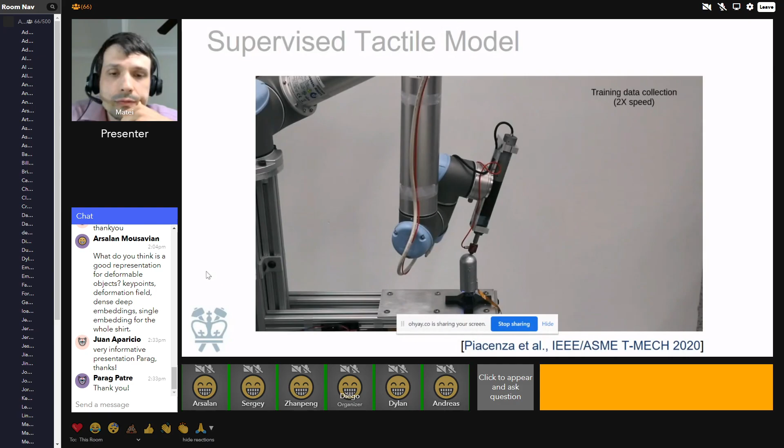In the supervised approach, we collect training labels for our tactile data. The way we get our training labels is by poking the tactile finger in very controlled fashion. So here, the finger is being poked by a UR5 with a linear probe and the load cell at the end, which allows us to collect very precise labeled tactile data, and it's labeled with the location of touch and the amount of normal force that we are applying.

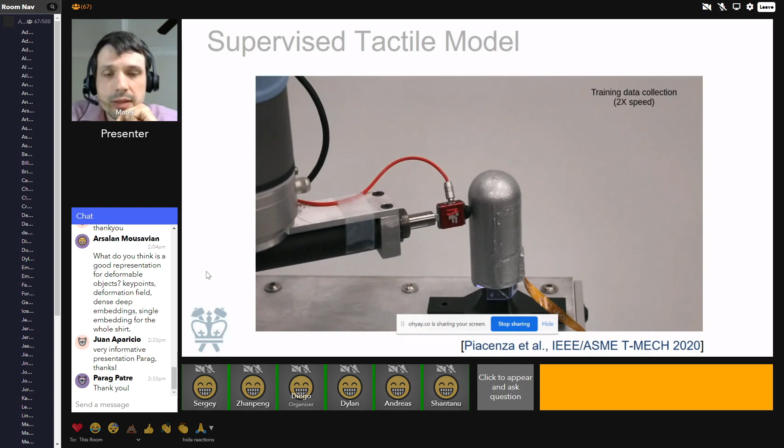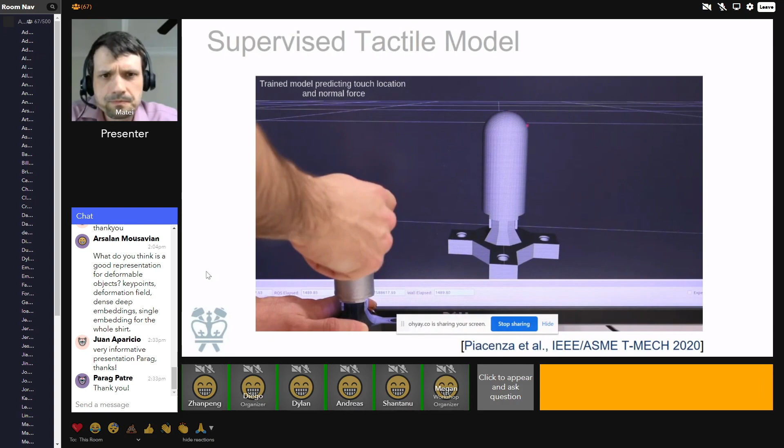So we have those labels, and then of course we can train a supervised model, a regressor or a classifier, that will then output touch location and normal force, which is shown here. And then if you have this supervised tactile model, you can take the things that it outputs, like touch location and normal force, and use them for things like model-free reinforcement learning.

This is work led by Gagan and also by Max, who also recently graduated from our lab. And what we're using this for is to learn in-hand manipulation via finger gaiting. We have a poster right here in this workshop in the upcoming poster session, so please check it out, which is why I don't really need to talk about this too much, so that you can go and check out Gagan's poster and he will give you all the cool details.

At a very high level, what we're doing here is we are learning in-hand manipulation with finger gaiting using only intrinsic sensing, just tactile fingers and proprioception. There's no assumption of known object pose. So then what we're doing is we're learning policies to rotate the object around the cardinal axis. Whatever object you're holding, the hand is trying to rotate it around X, Y, or Z. We're learning separate policies for each axis.

And also, very importantly, we're not relying on external support. The object isn't resting on anything. It's held purely by the hand, which makes the system very unstable. As soon as you do the wrong thing, the object falls away. It's a very unstable system. And we have found that this really hinders exploration in model-free RL. So Gagan figured out that this can be addressed using an appropriate initial state distribution, and I will let him give you all the details at the poster session.